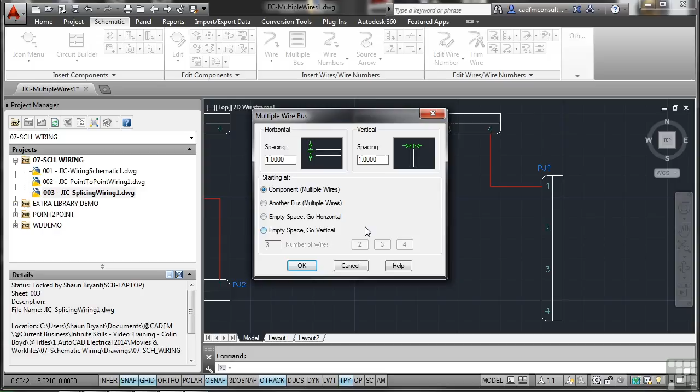Now I've got to look at the spacing here. I'm going to set the spacing up so that it's 1 inch by 1 inch, like so. I'm going to go for component multiple wires, and I can also go for another bus or an empty space vertical. So I can do horizontal or vertical there. The reason being is I might just be setting up wiring without connectors at this particular point.

So if I click on OK now, what it's prompting me to do is window select starting wire connection point. So you'll notice the connector points are now highlighted with their little green stars. Now you'll notice I've got snap and grid on. It's sometimes easier to do a crossing selection window without them on. So I'll now click and I'll drag across those points there and click for the second part of the window there. You can see the connections highlight. So 1, 2 and 3 are now highlighted with those little red circles.

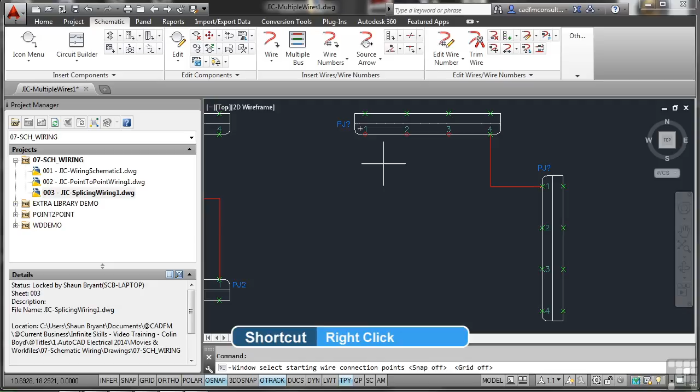I now right click to confirm that, and now it will prompt me to select the points where I've got to go to. And as you can see, look, I'm moving now. I can go this way, and the arrows highlight the directions of the wires. So can you see that there? Look, if I come down vertically, I can go left or right as well. So I'm going to come down here and I'm going to select a point where I want to go to. So you'll notice that goes straight to those connector points there on that bus there. So I click and it puts the wires in for me.

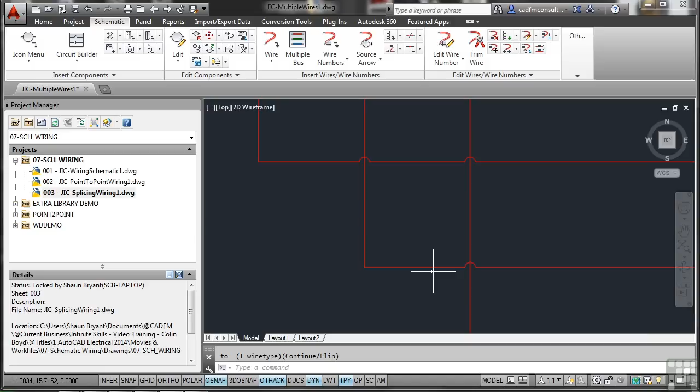The lovely thing about that, all the hoops are put in as well so that all the wires are clear and where they're going. Now the lovely thing about that is they are just wires. They're multiple wires, but they're just wires, just like placing a single wire. So the trick is there, I could then, if I want to, perhaps go to the icon menu and perhaps put a splice in. So there's my recently used splice. So I might pop a splice, say, there. So if I make sure I don't snap, so let's take object snap off. And I'll just click there. Now I'm not going to worry about a component tag, I'm just going to OK that for the moment. And you'll see my splice there.

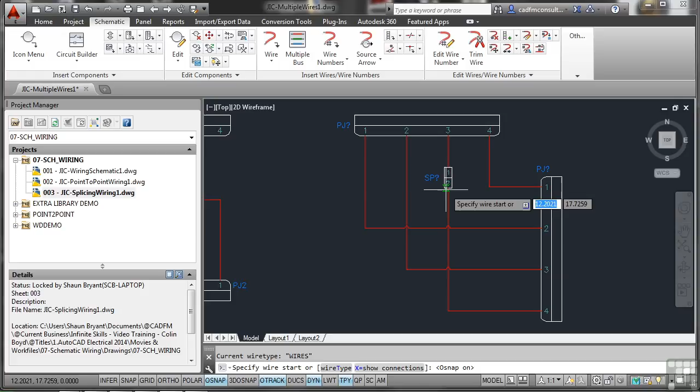Now the nice thing about that is I can now take wires from that splice. So if I do a single wire and take it from the O-snap, which I need to switch back on. So I go nearest there, zoom in a bit, nearest. That wire now comes off of there, and what I can do is I can take that maybe to there, like so, and click, and that takes that to the nearest one, which is number 1. Press enter, so I've got another wire going across. But you can see how clever the multiple wires setting is.

Now I don't have to have connectors. As I said, I can just put wires into space, both horizontally and vertically as well. But that multiple wires, as you can see, it's another time-saving exercise. It saves you having to draw multiple wires that are regularly spaced. Now obviously you can utilize snap and grid to do that as well, but you can specify the spacings horizontally and vertically between the wires, which makes your life really easy. It saves time, it's professional, it's quick, it's clean, but most importantly, it's accurate. So make sure that you use your multiple wires in AutoCAD Electrical.

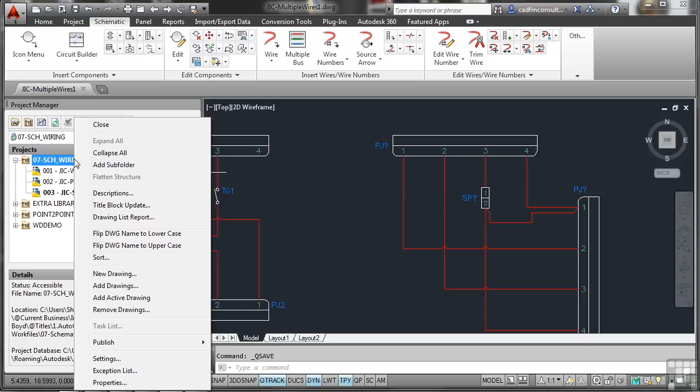Now, something we didn't do. Make sure that we save our drawing with what we've done, but also, more importantly, add your active drawing to your project. So it's a right click, add active drawing, yes to the default values of the project, and you'll see that multiple wires has got sheet 003 because I copied the previous drawing. So I'll right click there, go to properties, make sure you change the sheet number as well so it's all neat and tidy. And again, get into the habit of changing this.

It's so important to add your drawings to your project as you go, because you can so easily create a massive load of drawings in a folder and not know which project they're associated with. File management. Make sure that you add your project to whatever you're doing, but more importantly, add the drawings to the drawing list in the project as well.